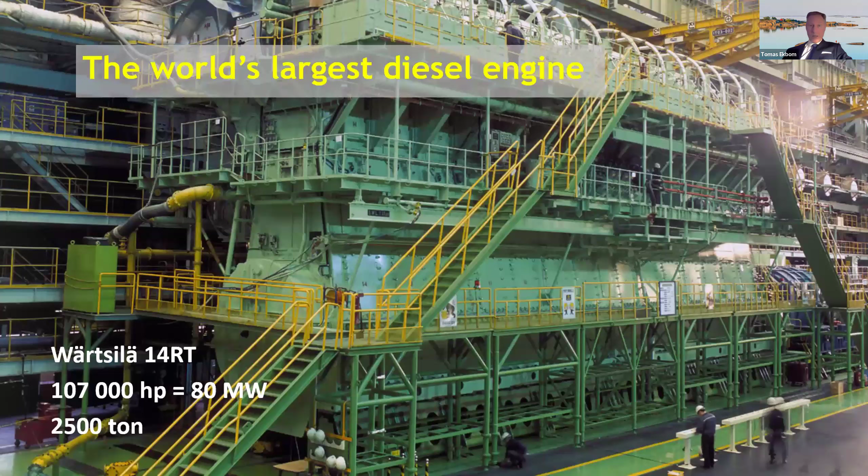Here's an example of the world's largest diesel engine in a ship. And the diesel engine is also an example of massive energy consumption. So it demands a lot of fuel.

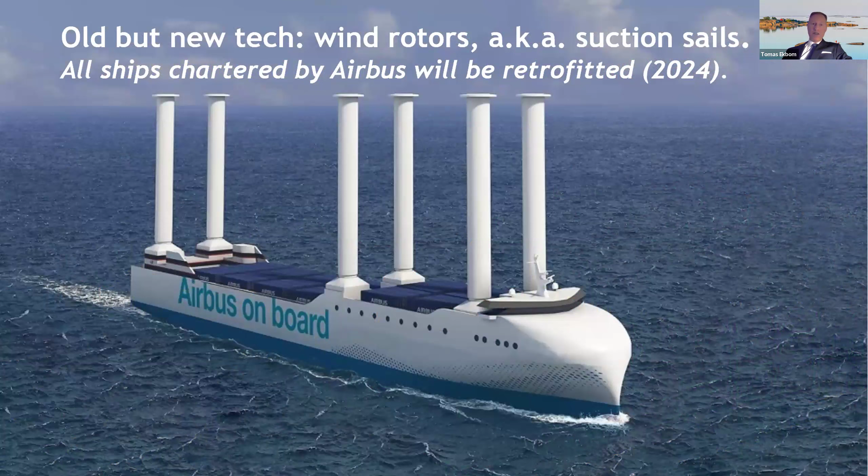However, for many years, the shipping industry has been mainly working in the same way. And it's been conservative in a way, but in the last decade or so, there have been disruptive technologies that have come and also a transformation in the industry.

So here's an example, old but new tech, where I have wind rotors or suction sails. And Airbus have made a project here that all ships chartered by Airbus would be retrofitted with these suction sails. And just recently, Maersk placed an order of suction sails on their 5 vessels with tankers.

Another example is a Swedish Oceanbird company with the return of sails. So these sails are elongated and can be lowered so we can be passing under a bridge.

We have another example of the Swedish ferry company Gotlandsbolaget. They strive with investments to reach climate-neutral ferry traffic. So they started with eco-driving and then switched to liquid natural gas and liquid biogas in 2018, and also lowering emissions when they are in harbor by using onshore power.

Well, what is the cost then for e-methanol? Here is an example with a study that was made by Ilkka Hannula for the IEA using calculation of different costs of assembling the CO2 and then the cost for the production with synthesis, electrolyzer, and then electricity.

And it can be shown here that the cost of carbon dioxide is crucial to lower the production costs. And if you can have a high concentration source of CO2, the production cost would be some $35 per gigajoule.

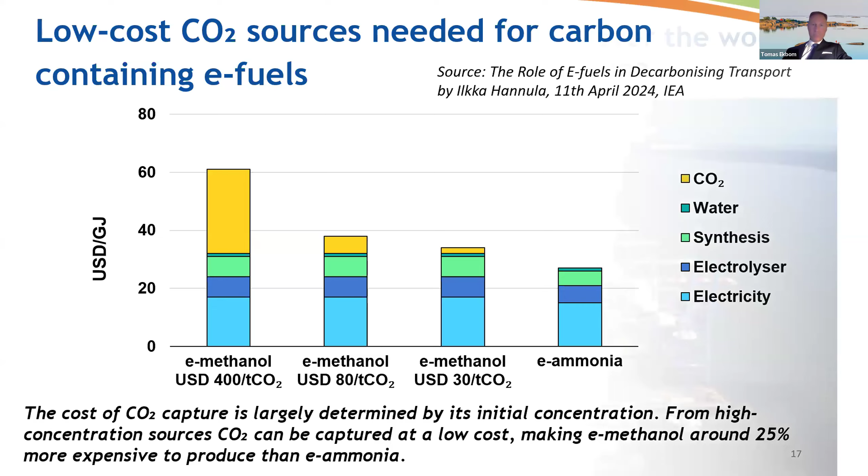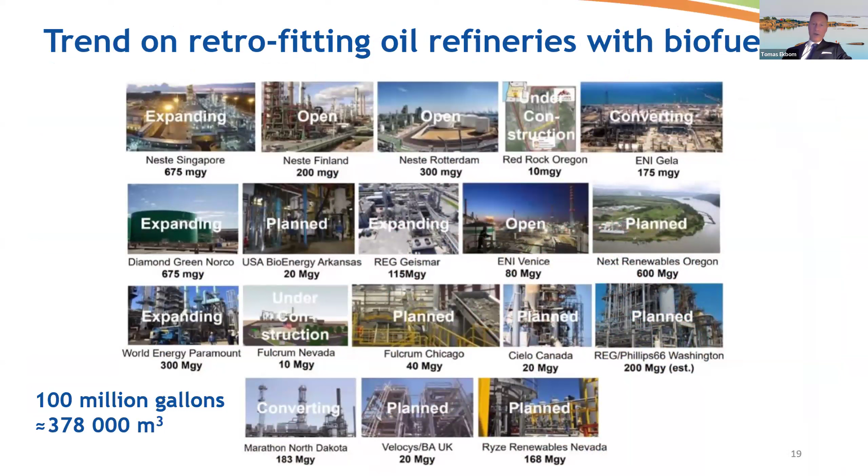Another trend is that large oil refineries all around the world are retrofitting their oil production for products like gasoline, diesel, SAF and heavy oils by adding biomass-based feedstocks. And the products are called HVO. And these oil refineries are very large in scale.

So global shipping is changing. It's in the midst of transformation to reduce emissions and to achieve climate neutrality. However, we all can make our own choices. And perhaps if you want to commute to work and you have rivers, you can use windsurfing. It's environmentally friendly and climate neutral personal transport.

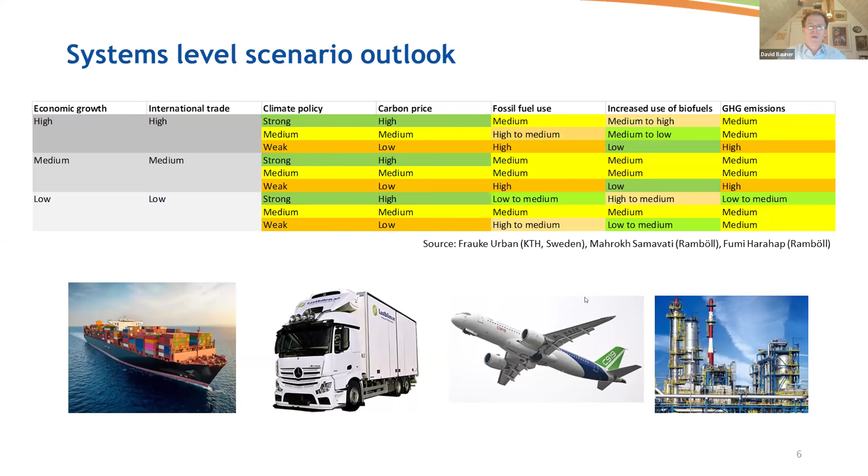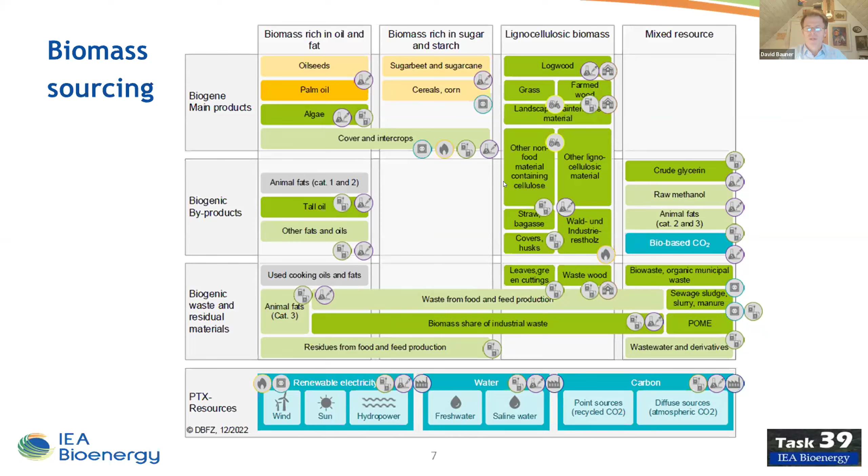So this sourcing, in short, can come from either using bio-based CO2 for e-fuels, or using biomass rich in oil and fats, or rich in sugar and starch, lignocellulosic biomass, or different kinds of mixed resources, such as glycerin from biodiesel production, methanol from its different feedstocks, biowaste, and so on, that could serve towards different means of production and for different fuels.

We can note, for example, also that regarding sourcing, limiting ourselves to sustainable sourcing for biofuel production, there's quite a few different kinds of sources of biomass which are allowed according to the European listing, Renewable Energy Directive 2 and 3. You can see it's about a dozen and a half different types of waste that you can use that are available in different amounts across the world, and they all need to be certified also in order to serve as feedstocks for biofuel production.

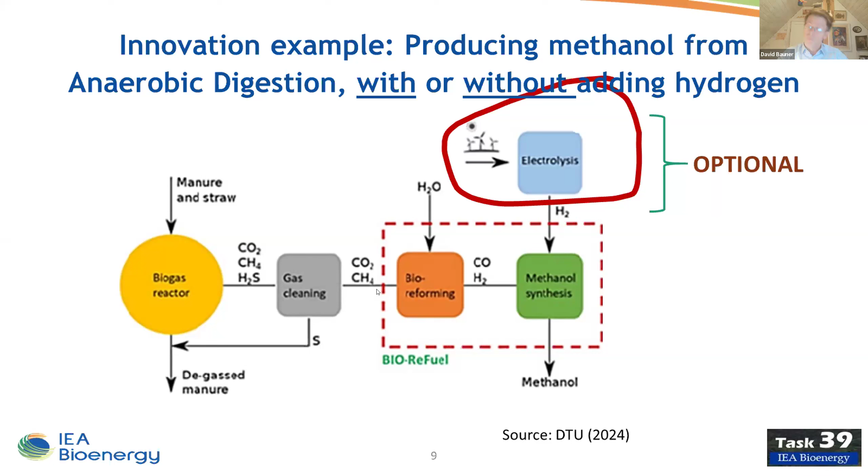Electrolysis is fairly expensive. So this is one innovation that also makes anaerobic digestion and the organic fraction of waste from cities and households available for shipping fuel, but also for fuel and biofuel for other sectors. By different means of production, then, we arrive at different kinds of biofuels that have characteristics more or less similar or in the range that makes them useful

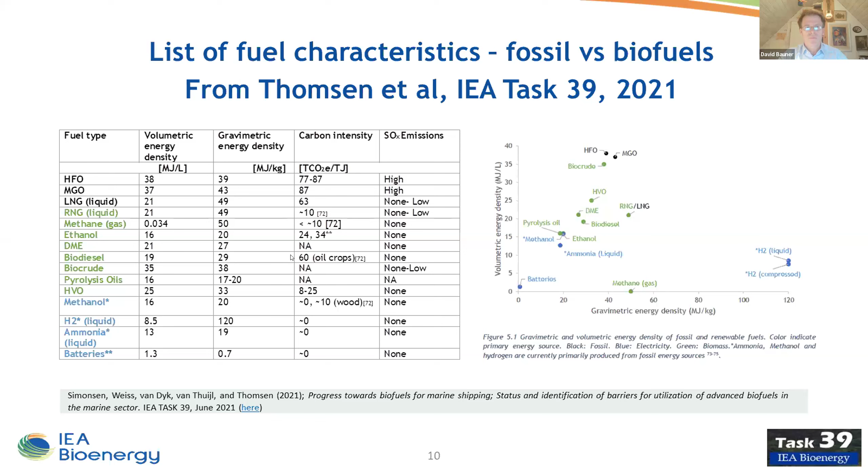also for shipping. We can see, for example, that biocrude has about the same volumetric energy density as the fossil oils used today, whereas the biodiesel has a lower volumetric energy density. So there you have to compensate by fueling more often if biodiesel is used, whereas HVO has a bit higher volumetric density.

Now, going into production, we can see that this innovation that I mentioned one example of before has different steps. It's not a matter of just starting some kind of innovation process and expecting to arrive at a result a defined time thereafter. You start off at a beaker level where you can make a very little amount, showing that the process is okay. Then you invest millions of euros to reach the bucket level where you have a slightly bigger pilot or a pre-pilot installation that shows that it's feasible to have a larger scale.

To reach the barrel level requires yet more millions of euros in investment. And then when you want to actually use the fuel commercially, to get to the bunker level, that's a very large investment and represents an industrial level engagement, with totally different partners and totally different levels of resources needed. So this is a complex area in itself that needs to be monitored and supported on the different markets where we want the regions to be autonomously producing enough to supply the region.

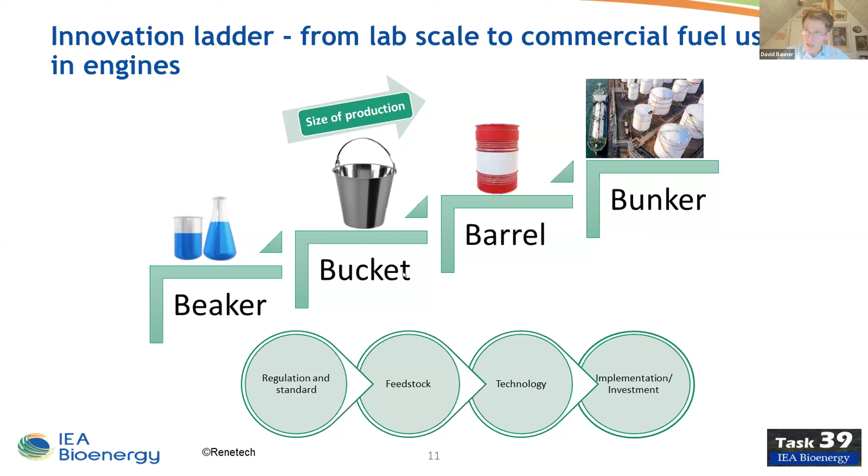Another area which is very important to overcome the barriers that we see today is regulation, where IMO, the International Maritime Organization, is leading. We'll come back to the different methods used, but it's about having an efficient ship and low carbon fuels by different design measures. There has for some time obviously been a discussion on reducing, for example, sulfur in marine fuels, which means that there's also a discussion on cost effectiveness for transport, which in turn has already put focus on energy efficiency in ships in terms of hull cleaning and sails, as we have discussed. There's the emission trading system in the EU.

The EU also has a maritime directive regarding the percentages of biofuels and carbon emissions from maritime fuels. There's a taxation directive with a bunker fuel tax. There's a revision that we've already looked into briefly. And there's sustainability and certification on carbon under development, which contributes to lowering the hindrances for biofuels as part of decarbonization of shipping. So RED 3, for example, states that 29% of the energy used should be reduced in greenhouse gas intensity, and subject to several regulations.

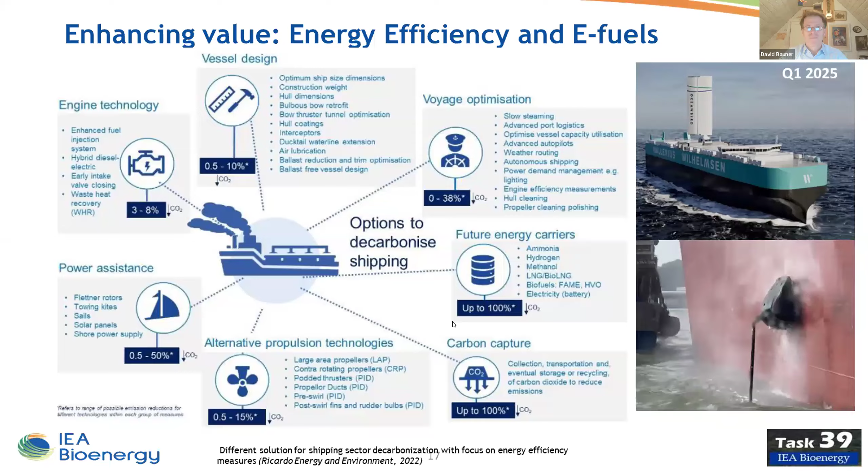So that's a big opportunity to look at, and there's a number of measures that you see here to achieve this. You see also the means here, including carbon capture. Sails is a reality, as was pointed out, not only from windsurfing, but from actual bigger ships as well. And several ships are now fitting these sails, and they can see 7 to 10, and I've seen numbers up to 14% of reduction in fuel consumption for a given transport relation, which is obviously very important.

In addition to that, obviously, we have drop-in fuels that Thomas mentioned, which obviously come at a lower cost of implementation other than for bunkering, whereas they can be used in regular ships that today use fossil fuels.

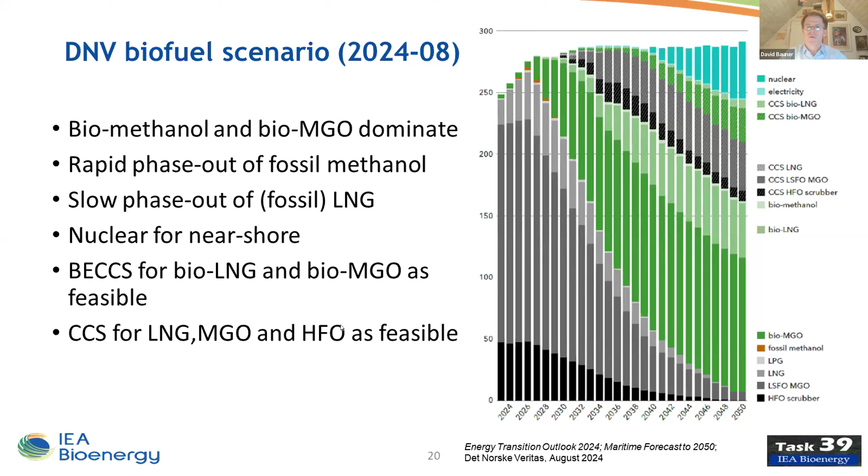But near shore, you see nuclear to supply power for electric. We'll see if nuclear will be that choice, but electric anyway. And CCS, carbon capture and storage, specifically bioenergy CCS for bio-LNG and bio-marine gas oil, for example, through pyrolysis. And for the remaining fossil fuels that will be on the market closer to 2050, they could also use carbon capture and storage to get rid of the emissions to air of CO2.

To understand then how to overcome these barriers, we can look to some conclusions. Anybody aiming to produce biofuel should look at the availability of feedstocks and the fuel on different markets, the scalability of the production, and the sustainability of the operations, that they are energy efficient in themselves, and that the end result works well along the value chain. The innovation from beaker to bunker size production, as I mentioned.

A very important part, which perhaps I should have focused more on, is that some harbors and some other organizations are coming together in what's called green corridors, where the prerequisites for fossil-free shipping are taken care of by these ports and these intermediate actors, which through alliances expand the market for a given transport relation. Between Singapore and Rotterdam is one example of that.

We should also know that regarding production, and for much of the innovation around decarbonization of shipping, 95% of these projects are sitting before the decision to invest. So there's a lot of work to do in terms of preparing those decisions and funding the deals. And then the implementation phase, the industrial phase, where funding, in-house R&D and engineering, like a large-scale rolling out of bunkering and transport and production capacity to get to the bunker level.

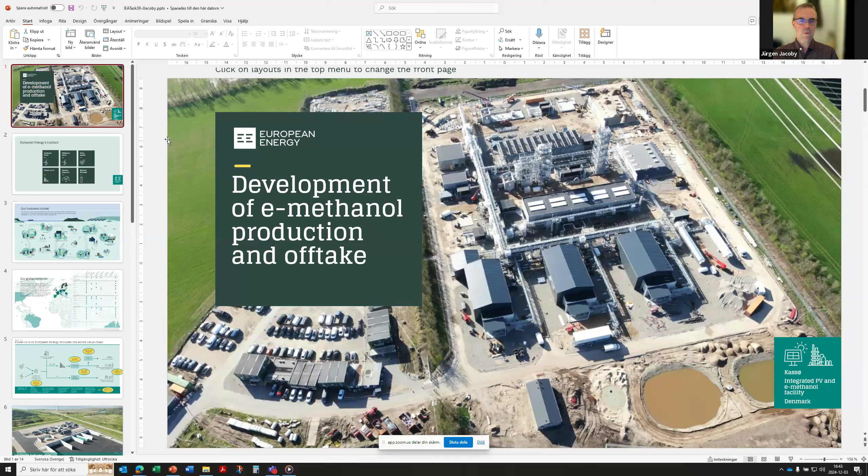I'm very grateful for this opportunity to present what we are doing in the field of e-methanol production and trying to solve the chicken and egg situation with availability, scalability, and of course the economy of renewable fuels in the transport sector. And I fully agree with the previous speakers about the challenges and the situation where we are in today. I'll keep it short.

We are not that well known, European Energy, as a company. We're about 850 people. We're a Danish company, and we're kind of a middle thing between a project developer and a power utility. So we do have own production facilities to generate renewable electricity in the form of onshore wind, offshore wind, as well as solar power. We are developing power-to-X plants, and I'll dive into that later on. We do have in-house competence for carbon capture and also for battery storage.

But it's fair to say that of all the projects that we develop, some we do sell off. Hence, we're kind of a middle thing between a utility and a pure project developer. And I will not go into detail with all these pictures in here. The only thing I want to highlight with this picture is, and I think vertically integrated is the term that is being used today, as a company, we do have a lot of in-house capabilities. We do have our own EPC department, we have our own construction teams, and we also have our internal asset management operations.

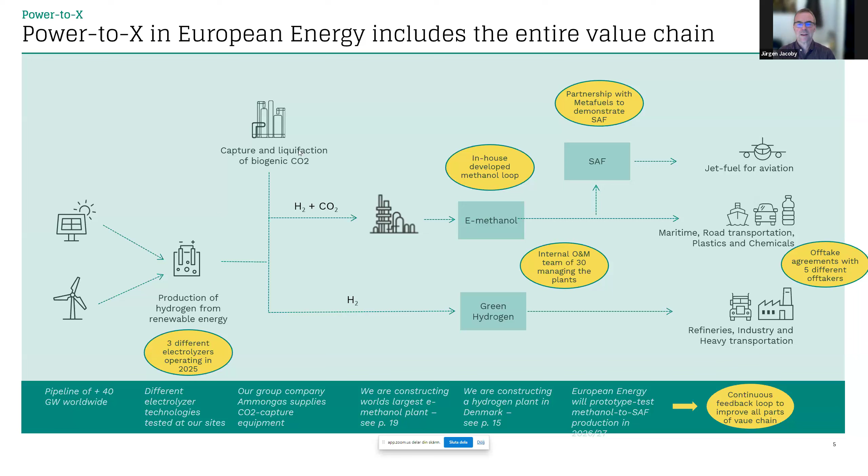We do have a hydrogen facility as well in Denmark, where we produce hydrogen at a relatively small scale, and I'll dive into that in the following slides. That hydrogen is then going directly to the clients that we have nearby. And here is an aerial shot of the hydrogen production facility. We are in Måde, which is hardly known to anybody. We're on the western coast of Jutland, the main country part of Denmark, close to the city of Esbjerg on the west coast. What you see here is a pure hydrogen production facility, and I hope you can see my mouse moving here. This white cylinder in the middle of the picture is the alkaline electrolyzer from a Danish supplier called Stiesdal. That's public domain info, so I can say it.

You see the auxiliary equipment around it for the power supply, the gas treatment, the polishing, the control systems. This big building in the middle, that's the hydrogen compressor. And from the hydrogen compressor, we fill these truck trailers, from where we truck the hydrogen about 5 kilometers to the port of Esbjerg, where we have an industrial client who is the receiver of this hydrogen. It's a relatively small unit, and I have some technical numbers on this slide here. This installed electrolyzer has a capacity of 4 megawatts at the moment, but the site is prepared for 2 additional electrolyzers. So once all 3 units are up and running, we're going to have a capacity of 12 megawatts. Now that sounds relatively small compared to many of the projects that are being advocated all around the world.

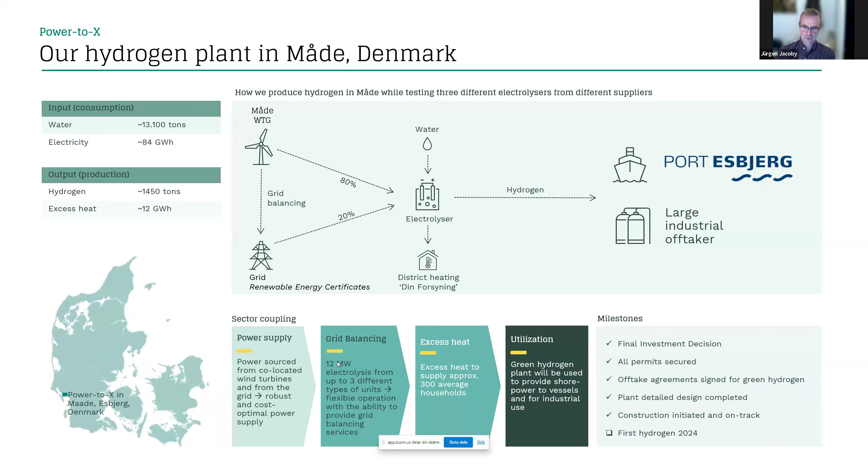Jumping back into this picture, I guess you get an impression of the complexity and the size you need. So producing hydrogen is feasible. It's done all over the world. It's not hocus pocus or Harry Potter magic or whatever, but it doesn't come cheap, and it's complex machinery that you need. This is the key message that I want to bring forward. It looks simple on PowerPoint. In reality, it's a little bit more tricky. The beauty of this site is that we have decided that we're going to test 3 different types of electrolyzers, and I will jump to this next slide to save some time. We're testing and developing together with our suppliers different types of electrolyzers, and this is for us as an operator and a power utility of key relevance, that we have a very steep in-house learning curve to get the experiences we need in order to be able to design the next facility in a better way.

We have decided on electrolyzer number 2. I honestly don't know who the supplier is, so I can't tell you. I really don't know. It's been communicated it will be a PEM technology, also a proton exchange membrane electrolyzer that we're going to install there. This will have about 400 tons per year of capacity compared to the 270 from the alkaline one. And supplier number 3 is to be decided. I don't know yet, but it will give us, as an operator, a unique possibility to test different technologies and see how well what works.

We are also going to test, and we're going to run the electrolyzers at a varying load profile. We learned already that the electricity price is a key factor in the price of the hydrogen. So when the electricity is very expensive, we're going to produce less hydrogen. And when the electricity is cheap, then we can ramp it up and produce more hydrogen, because costs are an important issue here. And we are very well aware of the fact that we need to bring down the costs for any e-fuel in order to make those fuels competitive in a global market, which we are in.

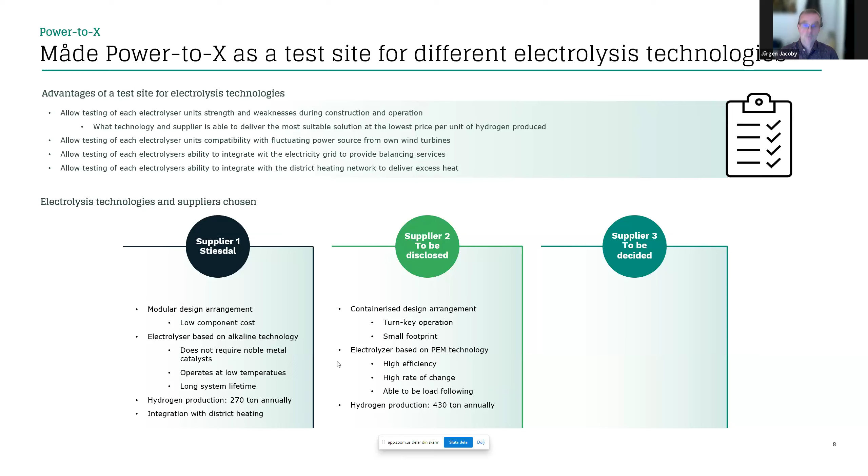Now, moving along, this is our e-methanol plant that we have built. It is ready. It is being commissioned at the moment, so it's not yet in operation, but the mechanical construction was finalized a few weeks ago. We have all the permits, and we are in the commissioning phase right now. This is also located in the southern part of Jutland, about 20 kilometers north of the German border, and I think about 15 kilometers away from the city of Aabenraa, or Obenro, in case you know it. So it's the southeastern part of Jutland.

What you see here in the foreground, the dark gray buildings, those are three 17 megawatt electrolyzers. We have chosen Siemens Energy as a supplier. Those are PEM electrolyzers. The main reason to go for PEM cells here was their capability of fast ramping up and down. Behind the electrolyzer buildings, there's a long building with the white rectangles on the roof. That's the hydrogen compressor building. And behind that, you see methanol production line number 1, and in the very background, methanol production line number 2.

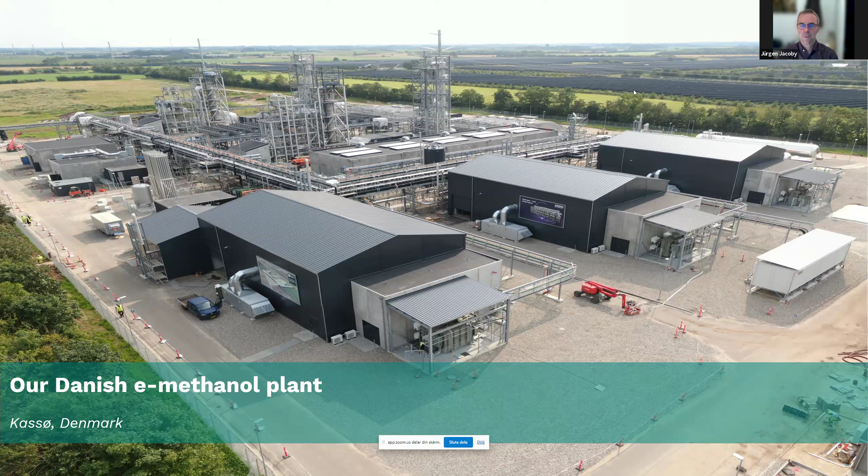Towards the horizon, you see the solar PV arrays, which is one of Scandinavia's largest PV parks that we own and operate ourselves as well. And basically, we can run this facility on 100% solar electricity when the sun is shining. Of course, the sun isn't shining all the time, so we need to be connected to the power grid as well. But we do have the electricity available to run this plant.

On this slide, I have some more technical figures on this one. We're not yet at the 100,000 tons, Thomas, that you also showed us in your list of e-methanol facilities. With this plant here, we're going to produce, we think, around 32,000 tons on an annual basis. It is designed for 42,000, so we can produce a little bit more. Again, the cost of electricity comes in here as a key factor in terms of bringing the cost of the methanol down in the end. We need a lot of electricity. That's also a really important issue. So producing e-fuels does require a lot of electricity. It's just a fact of the technology as it is.

We also need biogenic CO2. In this case here, we're going to use about 45,000 tons of CO2. That CO2 comes from a biogas plant about 25 kilometers away. So we do have truck transport to get the CO2, and we have truck transport for about 13 kilometers to the harbor in Obenro to ship out the e-methanol. Of course, the closer such a facility is to a CO2 source, the closer it is to the power grid, the closer it is to the harbor, the closer it is to a water source, you get the picture, the easier, the better. But that's a puzzle that is not so easy to solve, I'm afraid.

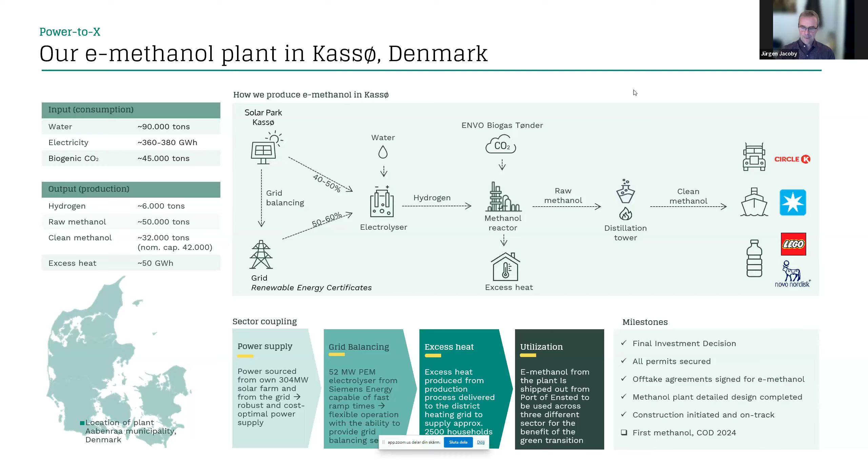Yes, here I have it. I knew I had one slide more on our clients, and this is the connection to the shipping industry. Our main client is Maersk, the Danish ship operator. They have a vessel called Laura Maersk, which is a container feeder vessel going from Rotterdam to other ports in Northern Europe. And that vessel will run on the e-methanol that we produce in this facility. Great success story. Really, really interesting. And Maersk has very ambitious plans to decarbonize its routes by using e-methanol.

Very interesting. I find as well that if we look outside of shipping at other sectors, for example, we sell the e-methanol to Lego. And now I'm talking about the Lego company who makes these plastic toys that I guess most kids use all over the world to build whatever. So they're going to use it for their low carbon plastics. And we also sell the e-methanol to a pharmaceutical company, Novo Nordisk, which is going to use the e-methanol for their plastic packaging for their products.

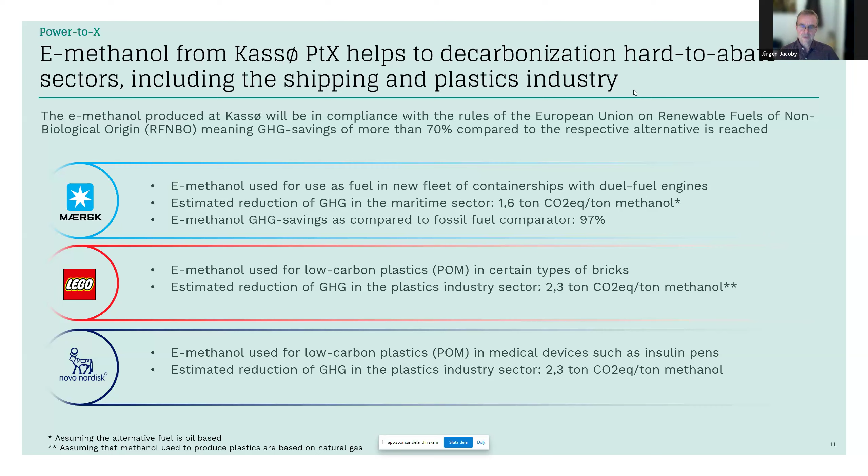We do put a lot of focus on finding clients. It doesn't make sense to have this billion investment to build a facility if you can't sell your product. So we do put a lot of focus on talking to shipping companies, to the chemical industry, to many different sectors, and also to the SAF sector, so sustainable aviation fuel, trying to secure offtake agreements. And as soon as we start talking agreements, price is an issue. So again, we need to bring down the costs of the methanol. We need to bring down the costs for the hydrogen, or somehow get hold of cheap electricity in order to make our product economically viable in a tough market.

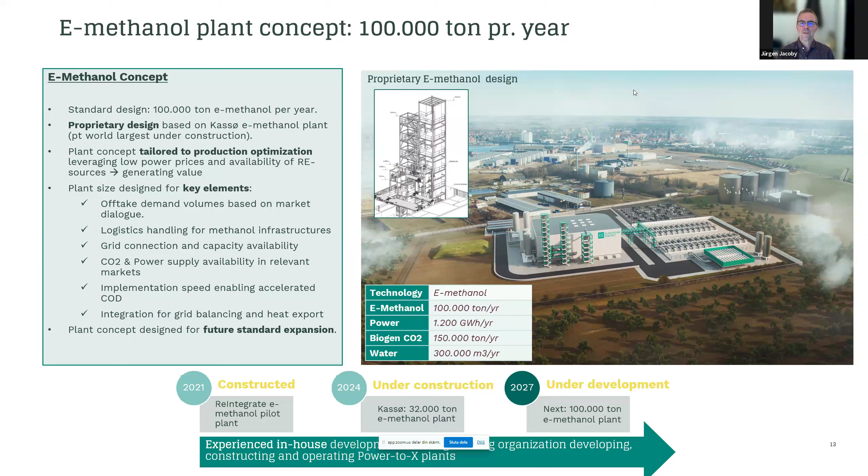We have secured land in the United States, in, I think, Port of Victoria in Texas, if I remember correctly. We have secured CO2. We have developments in Brazil that are very interesting, as well as Australia. And me being Swedish, working in Sweden, I of course hope that the Swedish plant will be the first in a row after the Danish plants that we have. We do look into Lithuania and Spain and Portugal as well.

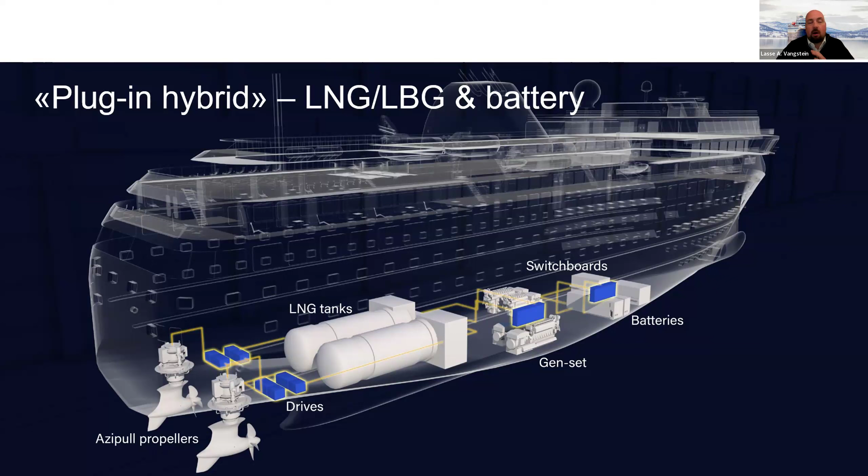Of course, when the infrastructure is up and running, we hope to be able to charge the batteries more to utilize them even more in daily operations. And we do utilize them in daily operations, just as your hybrid car. We get more power from the batteries when needed, and we charge them when we have excess power to spare. We try to run our generators at the set load the whole time to optimize our fuel consumption and again reduce our emissions. So we are on the journey towards zero emissions with our ships.

And that starts today with LNG and batteries reducing 30 to 40% CO2. Then the next step for us would be maybe from next year or the year after, start blending in liquefied biogas. They have the same properties, as you guys know, as liquefied natural gas. So we'll start blending it in and eventually go on biogas only with the batteries, then being carbon neutral. Then down the line, our ships are also prepared for hydrogen. That would require a refurb, but the systems on board, the electrical boards and everything, are ready.

So basically, with 4 ships as of today, and have in mind we have ambitions to grow on the coastal route in the future, we want to have maybe 3 or 4 more ships in the next tender. Then again, if we do not win, these ships are designed to be converted to expedition cruising. So a lot of the designs on board have already prepared the ships for future use if we do not win the contract. So with 4 ships in operation, our power need is about 300 gigawatt hours per year. We need predictability and availability along the coast to be able to reduce our emissions even further.